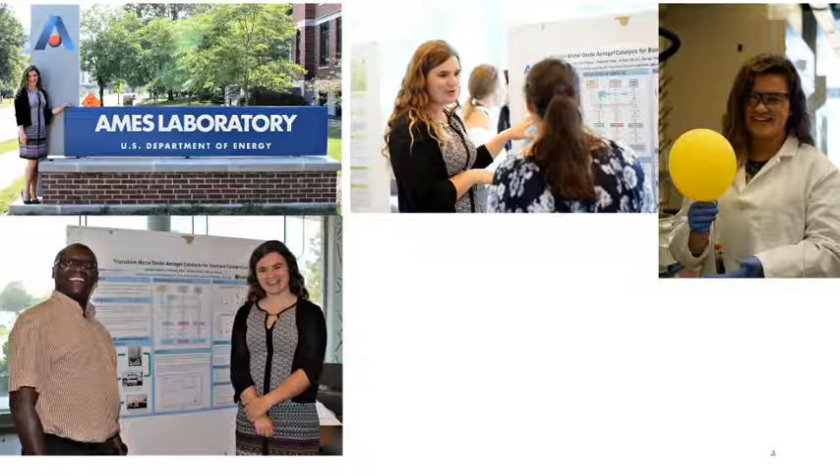So this is actually very productive for students, and I'm happy to take a student each time I go there. This time, we also have a student going there. She was working on catalysis, and this is part of the research that we were doing there. She made a very good poster. Obviously, she looks better than me, but that's beside the point. So most people don't know that during the Manhattan Project, the biggest part of the materials were actually processed at Ames Laboratory.

So the uranium was actually processed there. If you go there to work, there are some spots that are still hot, meaning you can go in and come out excited and illuminated, right?

There is also another place called the Critical Material Lab. This is where they make all kinds of exotic materials. I don't know whether you've heard of lead-free soldering, that's now the big thing, replacing the lead in solder. That material was actually developed there. It's a big cash cow for this place.

One more thing they have made is glittering paint, like you see on cars where the paint is glittering. That was actually invented or made there, and now they're starting to form a startup to commercialize it. So they've done a very good job as far as material science is concerned.

So briefly, I'm going to talk about aerogels, give you a brief history, and then discuss how they are made, some of the problems we've faced, some of the opportunities, typical uses, and then I'm going to focus on vanadium aerogel.

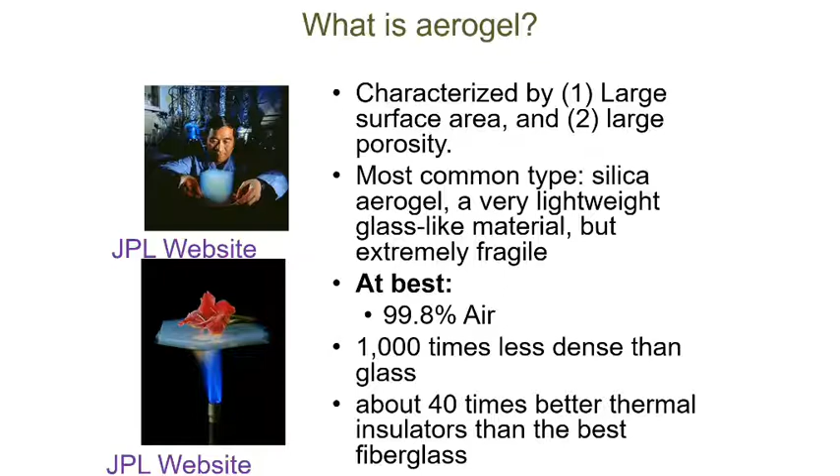We have a material that I'm working on with Dr. Demko, and if you put that material in an oven at 150 and leave it there for 4 hours, you can actually take it out with your hands. 150 C, not F, that's close to 300 and something. So those are really unique properties that we want to explore further.

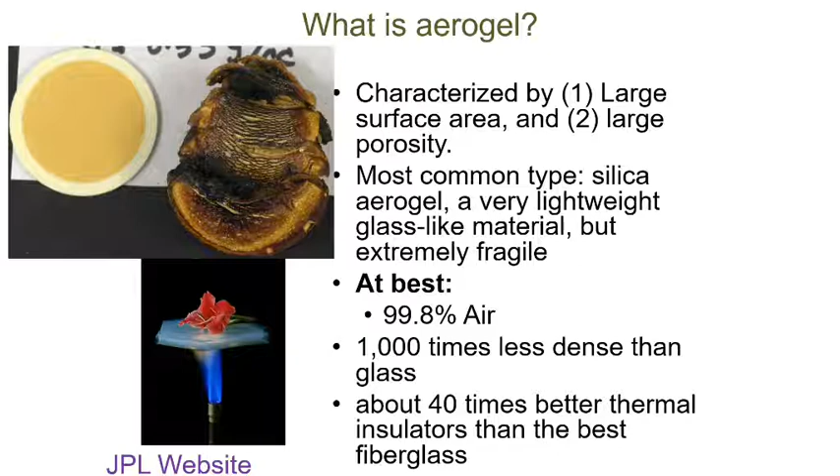Because of that porosity, they can also have some instability in them. This is a material I was working with when I was at Oklahoma State. What happened here is similar to this, but then I touched it with a Dremel tool and it started burning extremely rapidly and filled almost the whole lab with smoke. That was not the best night of my life. But you can see that they can have these instabilities that you can either take advantage of, or they can cause harm.

A brief history about aerogels is that they are not actually new materials. They were invented in 1930, around 1931, at Stanford by a guy called Kistler. He was competing with one of his buddies about whether a gel is made up of a framework of solids. The other guy argued there cannot be solids inside the gel. Kistler was trying to prove there is actually a solid framework within the gel. The key was to take out the liquid without damaging the framework, right? So in the 1930s, he was able to do that using a supercritical process, which I'll explain in a few minutes.

But then there was no use for them. For one, Kistler actually quit Stanford and went to work for Monsanto, a company that makes all kinds of chemicals, and that's where he decided these aerogels, especially silica aerogels, could actually be incorporated into toothpaste. So your toothpaste actually has some component, some remnant of this. And then, of course, they were forgotten, nobody really cared for them anymore.

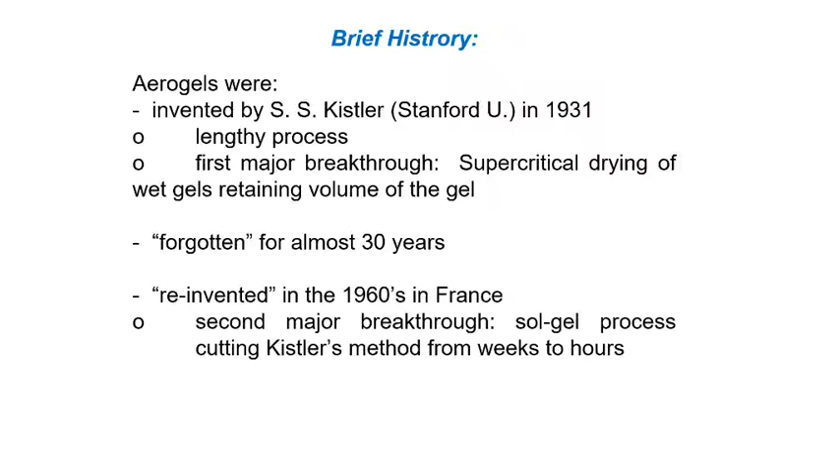Nobody cared about aerogels until the 1960s and 70s, when the French government wanted to use liquid propellant on a rocket. With liquid propellant, there's this instability that can happen when the fluid sloshes back and forth—like putting liquid in a cup and imagining what would happen. So the French government wanted to eliminate that problem by storing the liquid propellant in some kind of solid media. They decided that aerogels would be the best idea to hold this propellant, and from there they decided to use a different process, called the sol-gel process. We're going to talk a little bit about that in a minute.

This is your typical material—you can have different starting points. For example, all aerogels start from a metal alkoxide or something like a metal oxide that is dissolved in a solution. Then you can either do a spin coating, ending up with a very dense film, or pass it through a spinning process and through a furnace, ending up with a very solid piece of ceramic. Another way is to go through this route, which is the one we are going to follow.

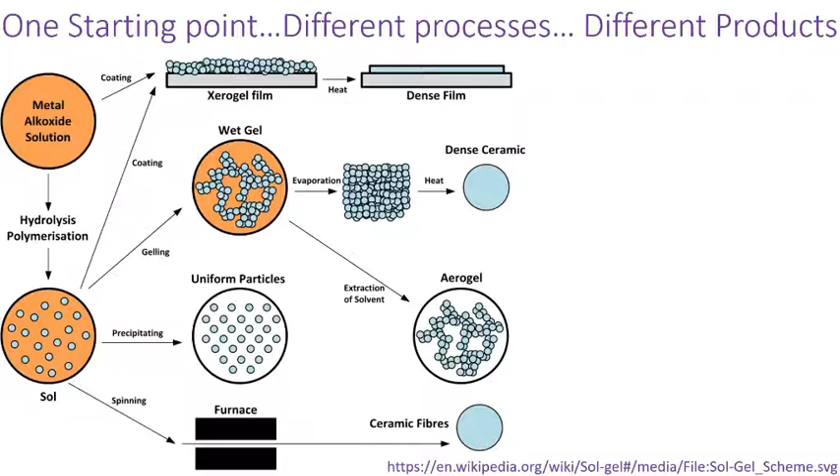It's called the sol-gel process, where you force them to form some kind of a condensate, and then you can evaporate, and then heat. You can use supercritical drying to maintain that framework. If you don't—if you just evaporate—you're going to end up with a solid piece, which is not something that you want.

But for now, I will be talking about this process that forms the aerogel. Most aerogels start like this: you have two precursors, you mix them and form a sol, which is basically a hydrolysis process. You want to wait a few minutes to age, and after you age, those networks basically stay in place—they don't move anymore.

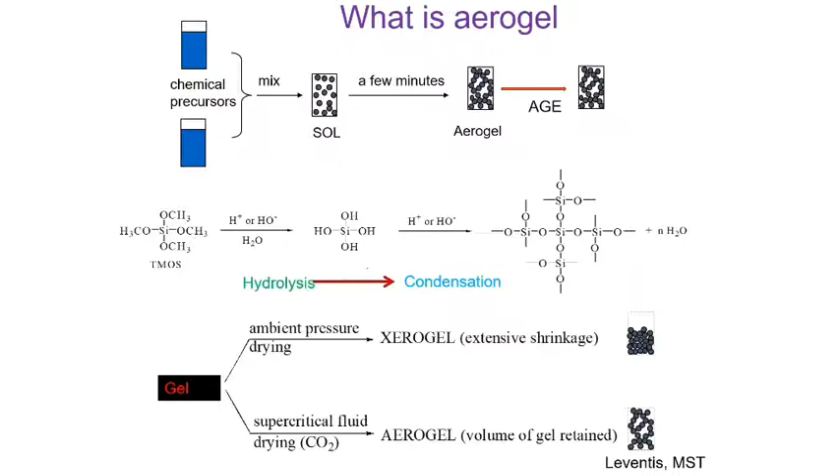We use CO2, and CO2 has a critical point at a temperature around 31 degrees and 73 or 74 bars. So whenever we are there, now we can use it. Why are we using supercritical fluid? Again, because we want to overcome what we call the surface tension.

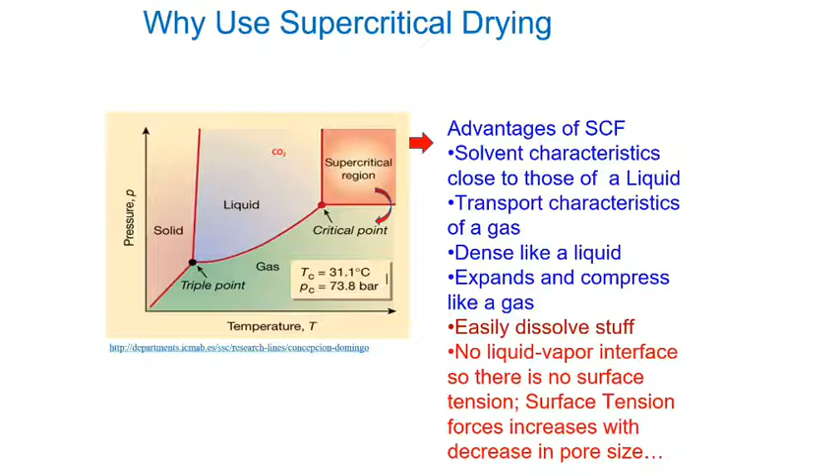Remember, if you put a fluid on a regular glass, it's going to form a meniscus. If this wall is not strong enough, it's going to pull this wall inward and break it. With aerogel, the walls are not strong enough, so they can easily break. If we use a regular fluid, we can't be successful. So most of the time, with the supercritical fluid, it's going to form a surface like this, and when it starts evaporating, it's not going to pull this inward. That is why we use supercritical fluid.

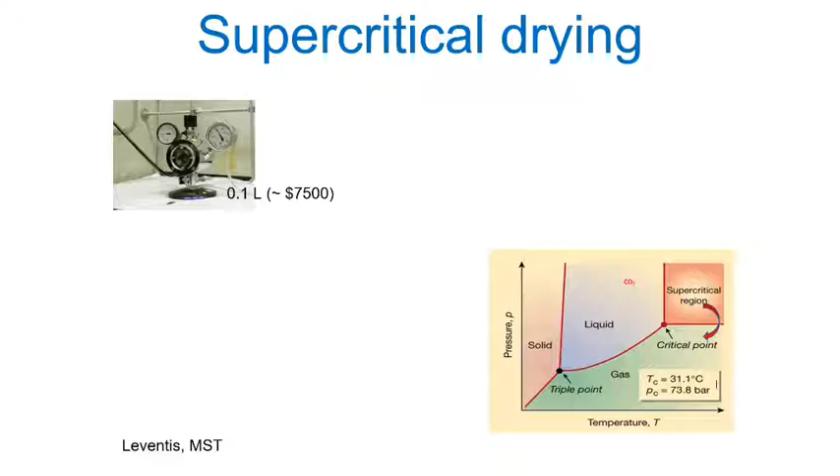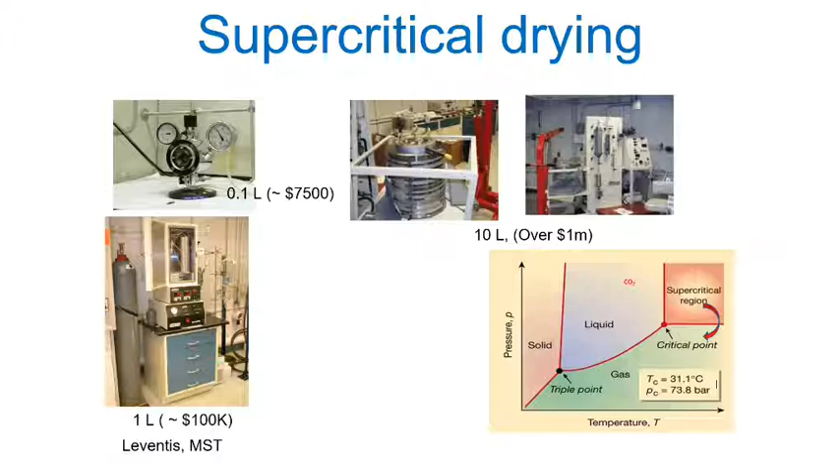But supercritical dryers are very expensive. This one is from MST, another one from MST, and this one is from NASA - just a 10-liter container costs 1 million. This is what we bought at UTD, where we did this work, and this one is not very expensive. So again, we have the process going, but we want to figure out whether we can do other things.

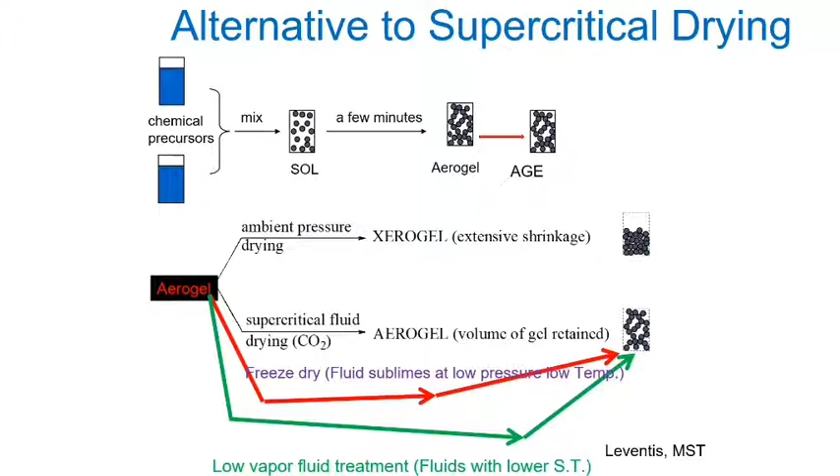Can we actually avoid supercritical dryers, which are very expensive, and try something else? One option is freeze drying, where you basically freeze the sample, reduce the pressure, and the fluid sublimates - if you freeze and then lower the temperature and pressure, you get a sublimation process. Another thing we developed at UTD was a low vapor fluid treatment, where we try to mimic a supercritical fluid by using a fluid that doesn't have any meniscus. Meniscus is your enemy, so we don't want to use that. That is something we have done before.

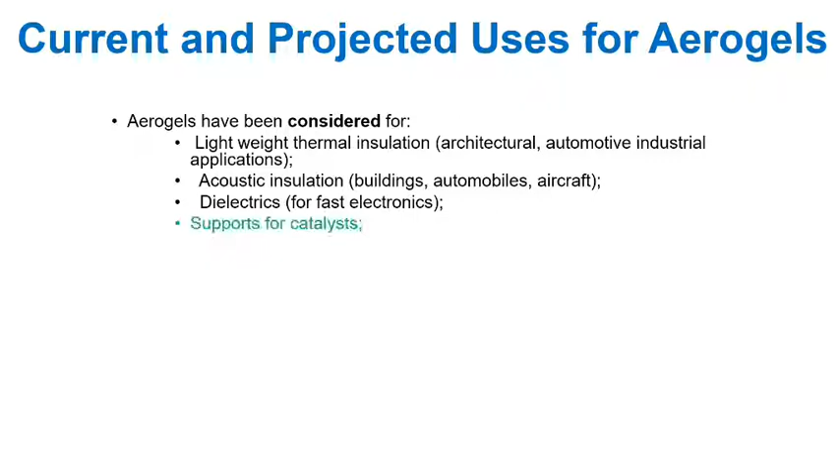So why do we care about these materials? One is for thermal insulation - Dr. Demko and I are going to be exploring that. Acoustic insulation is also very good. We can use it as a dielectric, something else we'll be testing, and for catalytic support, which is what we went to do at Ames, and I'll give a brief on that. Also as a host for other chemicals - we used some of the aerogels we developed to host other guests. We can also use it for filtration, optical sensors, aircraft structural components, and as Cherenkov detectors.

Do you know how this one works, by the way? Anybody know how a Cherenkov detector works? No? So basically, if you have a radioactive or nuclear power plant, you want to put something that can detect radiation particles. When those particles are released, if they go through the aerogels, they are diffracted at different angles - just like when light refracts. So we can tell what kind of particles are being emitted from a radioactive source.

They can also be used for tissue engineering. This is something we've done because it's so porous - we can introduce a cell, and that cell can grow. For example, we can direct how a bone is going to grow - if we introduce a bone cell, we can actually do that. That is work being done at Oklahoma State. I was involved briefly with it, but that's probably not something I'm going to keep pursuing.

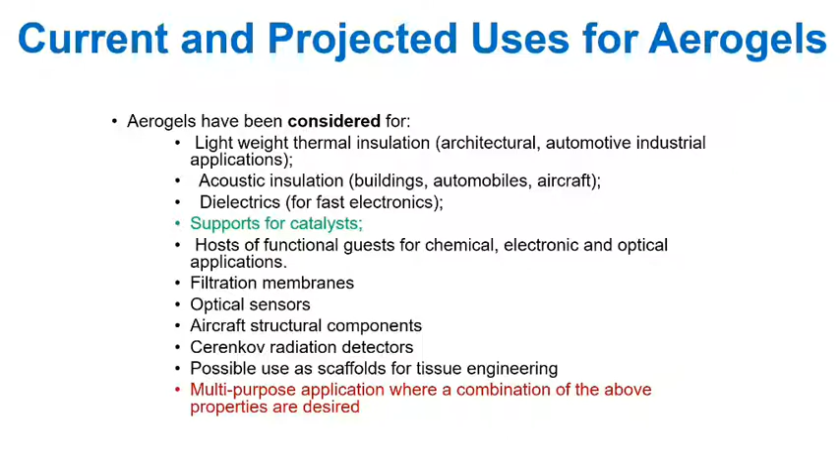One of the most important things is that all these properties can be found within one sample - you can have all these combinations in just one sample. They have actually been used, for example, to trap comet dust - NASA used this to trap comet dust. They made this racket, and when the spacecraft passed through a comet belt, they were able to trap this within the material. Another use is to reduce the heat signature on an aircraft, especially special forces helicopters, where they don't want to be detected. They can put a piece of aerogel on it, and that will reduce the heat signature.

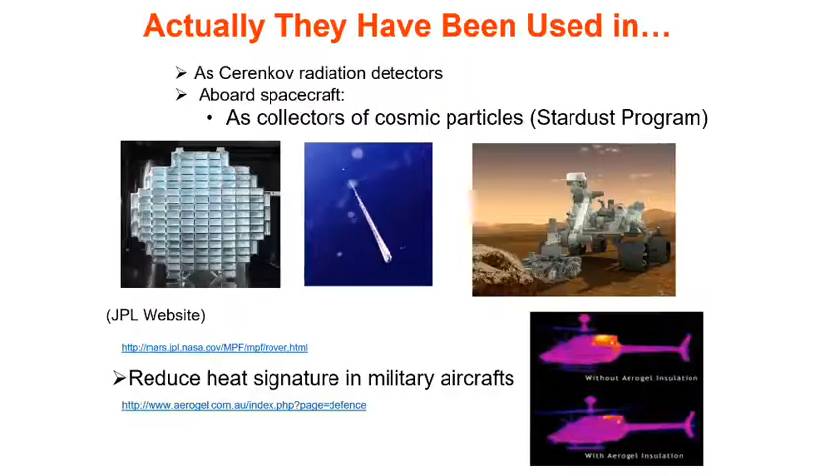So, did you see that?

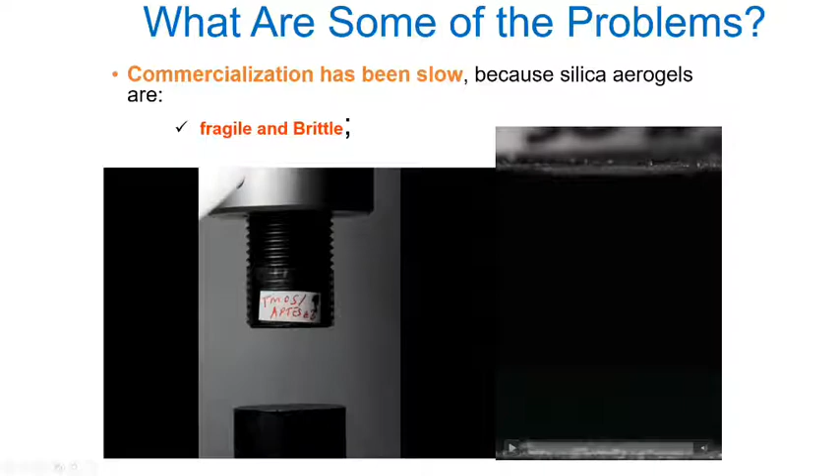So if you apply any kind of force, they are going to fracture.

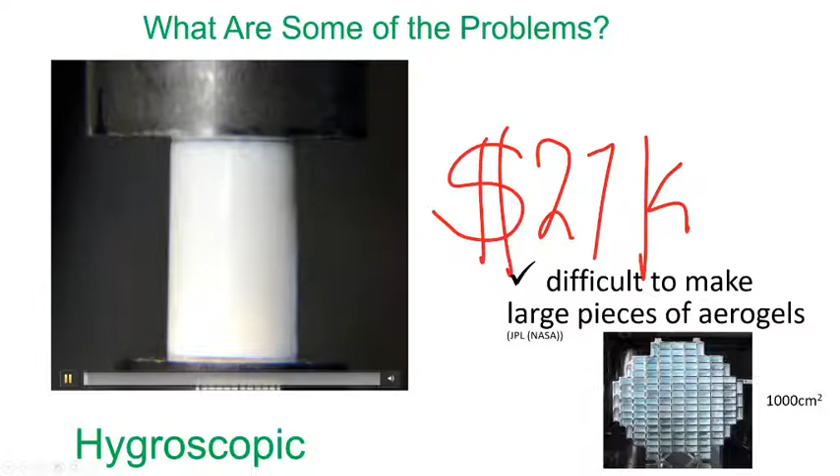They also absorb water. This is a sample that we made, and we just left it on the bench. When we did that, this is all the water from the air that was absorbed by that sample. So you can see it can absorb quite a bit.

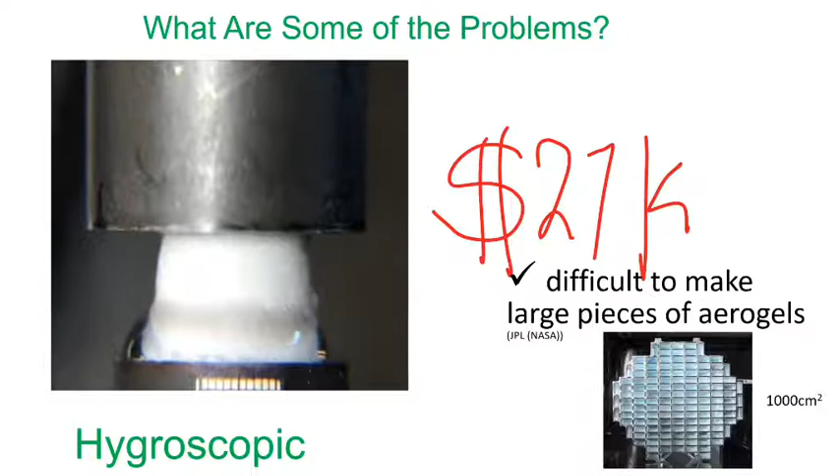It's just like crushing tofu. Yeah, you don't want to eat this one though.

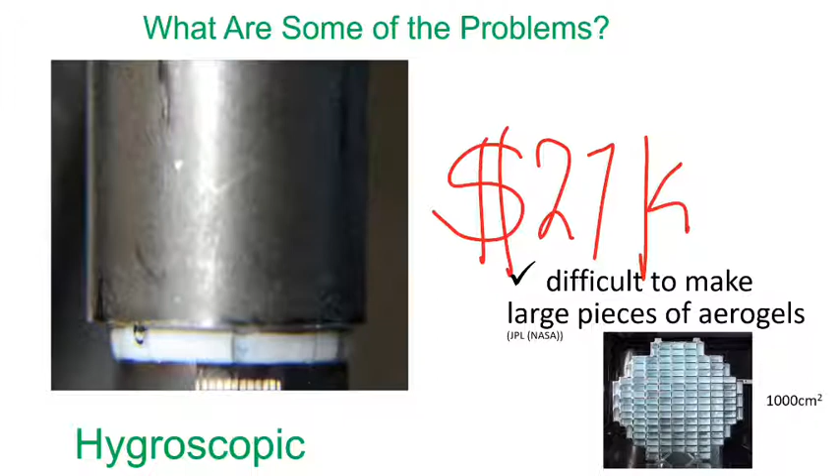Good for you. Yeah, so also the supercritical dryer is very expensive. And if you look at this, when NASA wanted to make this racket, they had to actually make very small pieces and then put them together, because they can't make one big piece. So that is something that we wanted to overcome, basically eliminate this so that we can make bigger pieces.

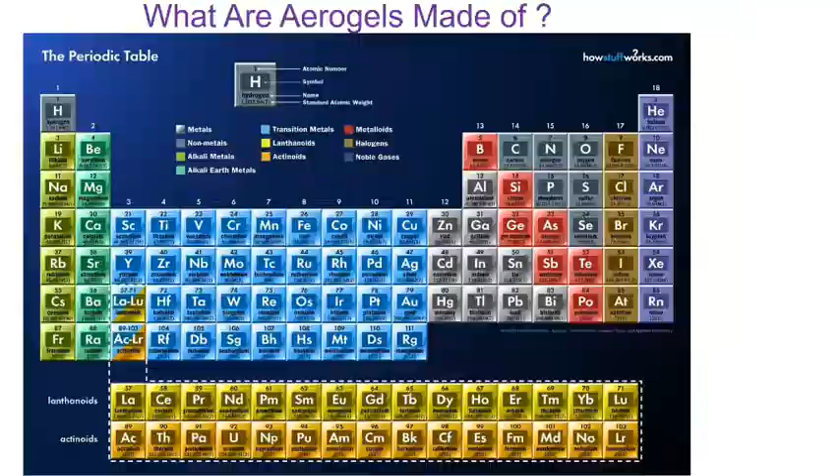So aerogels can actually be made from most of these elements on the periodic table. If you look at the periodic table, you have all these beautiful looking elements, and you can actually make aerogel out of them. The process is like, if you want to make an aerogel, you can either choose an organic piece or an inorganic piece. In this case, there are the natural ones, like cellulose. We can have man-made ones like polyurea, polyurethane - we have made all these. And also, if you want an inorganic piece, you can choose from all these exotic pieces. Each one of these is going to have special characteristics that you can use for special cases.

So you can have either native aerogel, or you can also cross-link them, meaning you apply a coat of polymer, and then you can easily form what we call cross-linked aerogels.

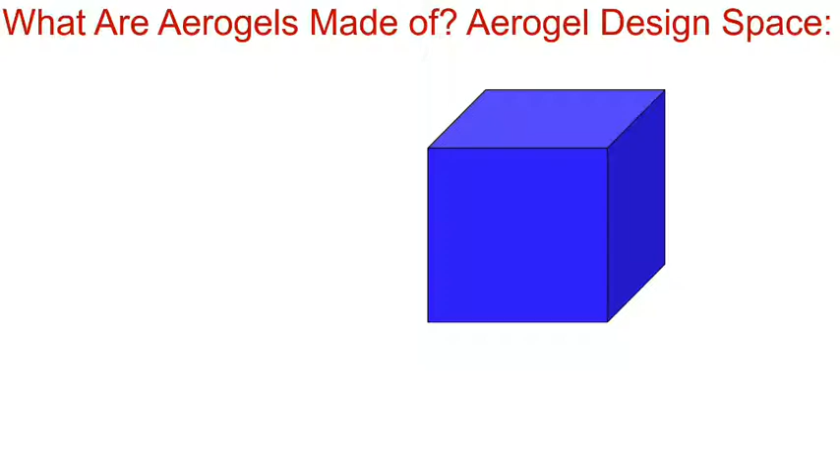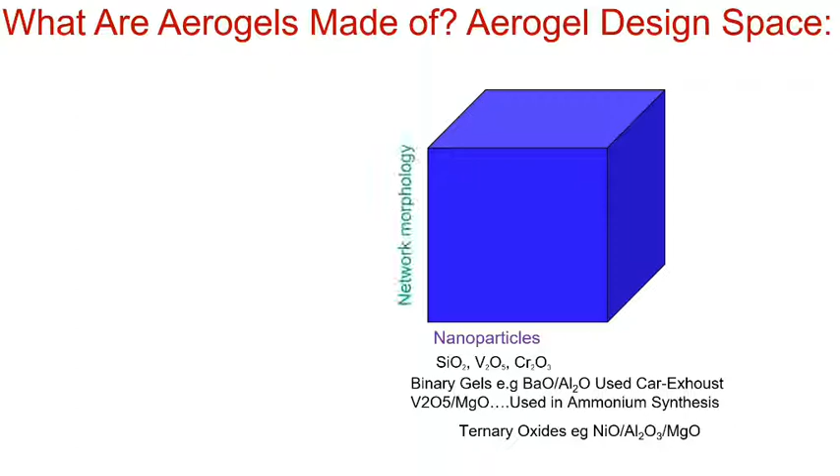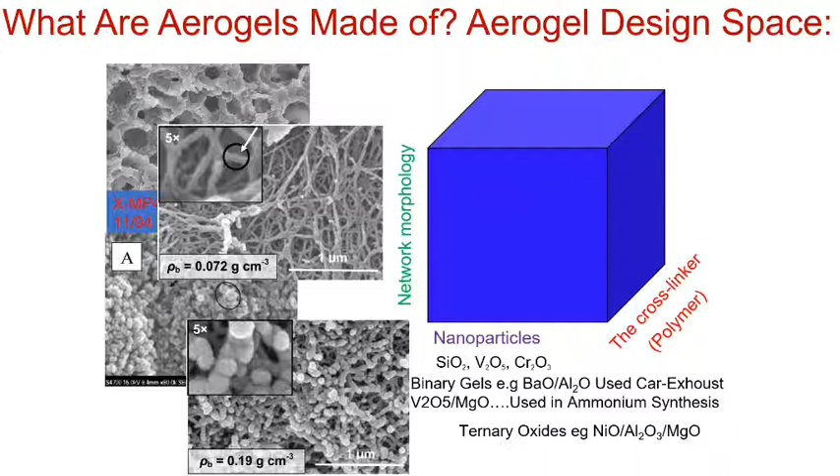We can also have this kind of morphology where you have, basically, this is like a string kind of thing, or you can also have this type. So you can choose the nanoparticles, you can change the morphology, and the third thing you can do is cross-link them. You can have all these and now use a thin layer of polymer to make them stronger.

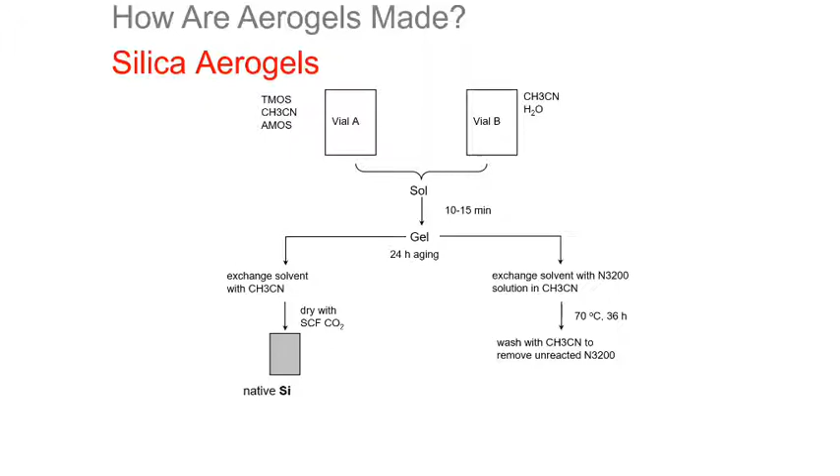So if you start with a silica aerogel, which is the basic aerogel we have in our labs, you start with 2 vials and then mix them. You are going to gel and then age, form a sol and then age, and then do an exchange - some kind of solvent exchange. Then you can dry it with a supercritical dryer to form a native aerogel. If, on the other hand, you want to add a polymer, you can add it to make it stronger, and then you can end up with something like this.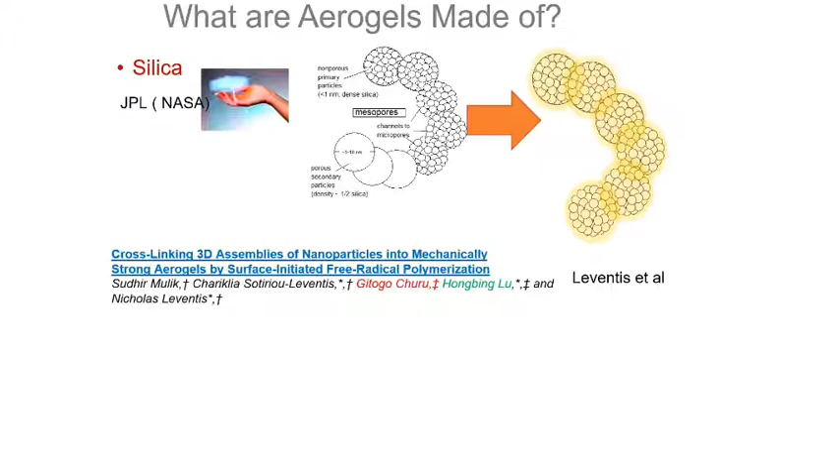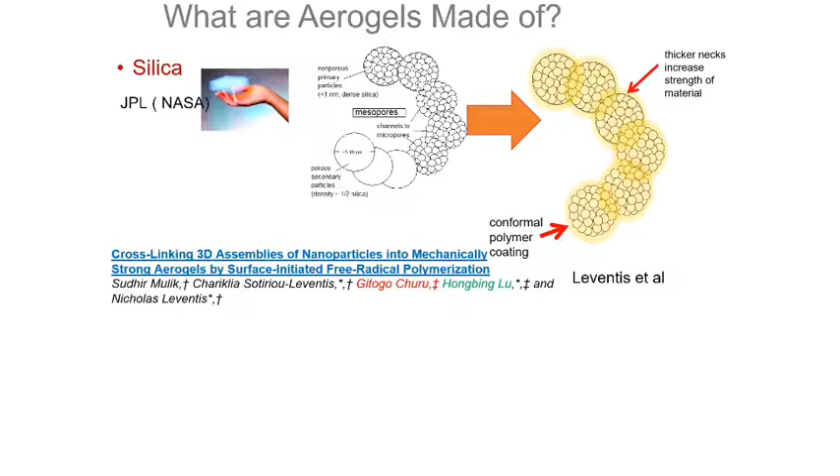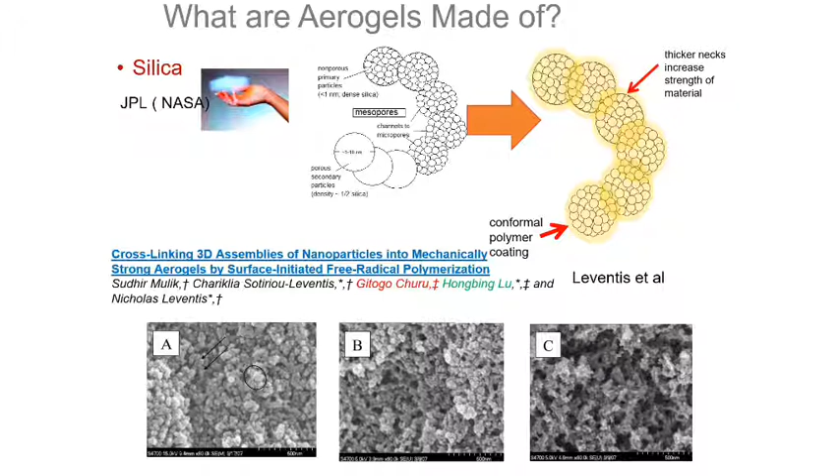And that is what we have done here. We started with a silica aerogel like this, and then we cross-linked it to make it stronger. Basically, we are adding a layer of polymer without increasing the density. This was developed a few years back - we developed it when we worked with this group at MST, and we have been working with them for quite some time. So this is the coating we are talking about. And if you do that, we don't see any difference between the cross-linked and the non-cross-linked - they remain porous, but they are a little bit stronger.

Polymers are something else we have done. We have done a lot of polymer samples. We can change the morphology of those polymers and come up with all this good stuff. One thing we did - since we're in mechanical engineering, we like to crush things, we like to make material suffer - is we compressed it.

And when we did that, it became transparent. Your physics should tell you what happened here. I can't remember - there is a process where something becomes transparent after application of pressure.

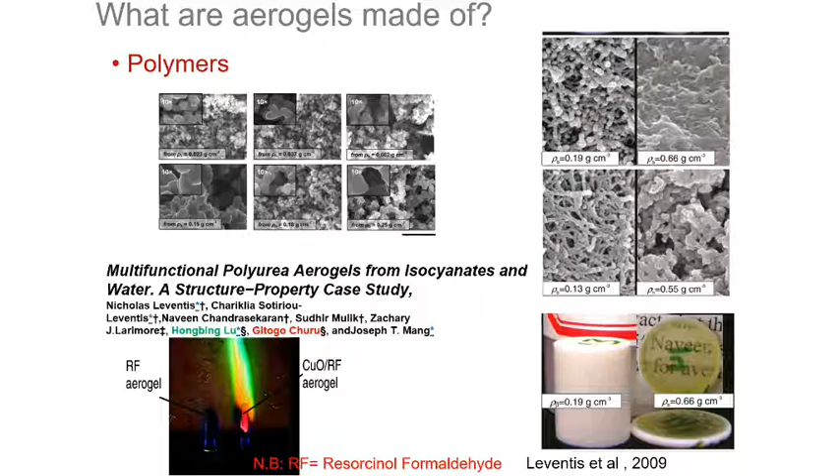This is another case where we have another aerogel, but this time we put copper oxide in it, so we have an oxide. The RF, which is this material here, was like a polymer. And then when we introduced fire, we completed the fire triangle, and this material can burn extremely fast and in an extremely scary way. So if you are ever burning this, make sure there's somebody watching so they can come and rescue you. That is basically how you make an explosive, but it's not good for you.

The other material we have worked on is called the vanadia aerogel. This is the material we went to work with at Ames because we wanted to use it for catalysis. The process is very similar to what we did with silica.

We did some compression tests, and as you can see, we can actually compress it to a very high percentage. We tested it at minus 150 degrees, and we got this really good curve, meaning we can actually use this for insulation when the temperature is really, really low. One instrument that uses this low temperature is your regular - what do you call it - the one that scans you when you go to the doctor, the MRI. So we can actually use it in this case.

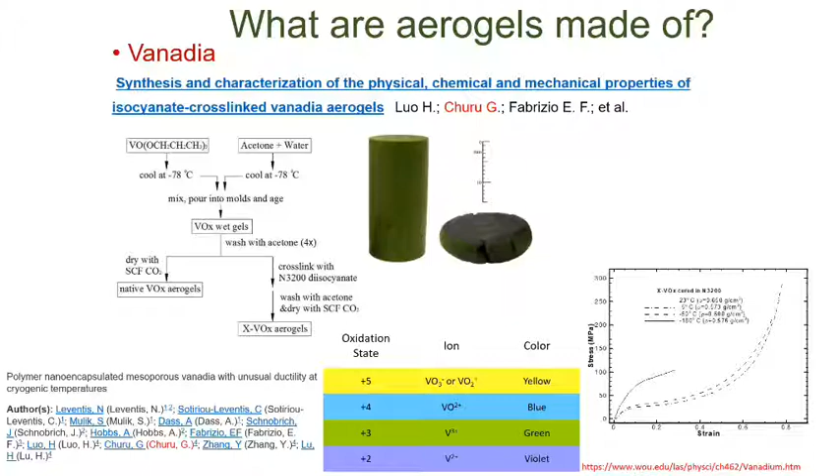Another application that a group at Ames was studying is being able to incorporate some metal oxides or other gas elements and form what we call a nanocomposite. When you have a nanocomposite, you can actually replace this with, for example, a chemical that you can easily direct to go attack a tumor.

So how would you use such technology? If you had a way of delivering chemicals to a tumor, this could actually be used for therapeutics, and the guys at Iowa State are actually looking into that.

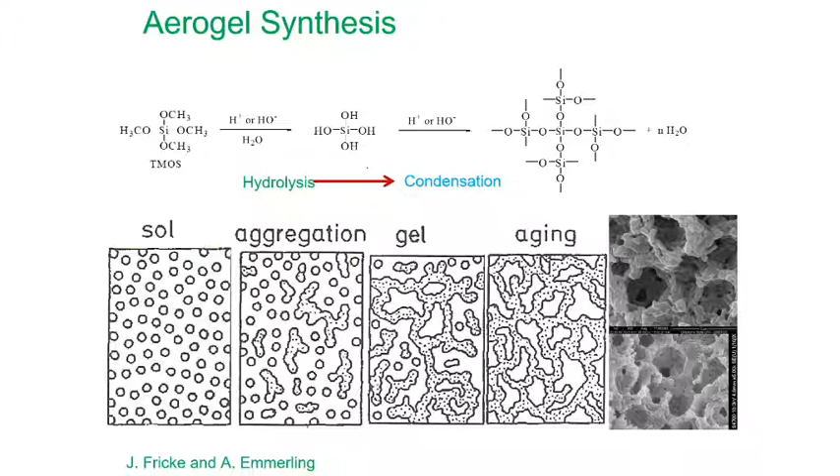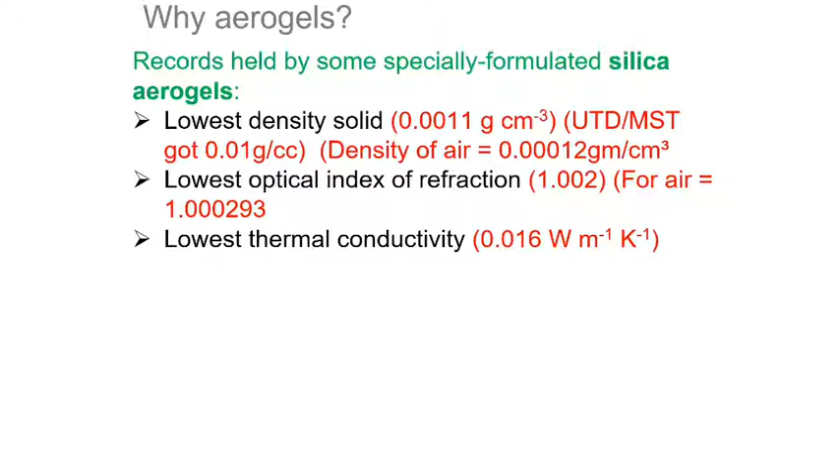So again, this is basically how the aerogel is formed: you have the sol, you force it to aggregate, and then you age it, and then you get to that point. These are some of the records we have seen - the lowest density, best optical index, lowest thermal conductivity, which we are going to be going through, dielectrics, and also all these can be found in the same component.

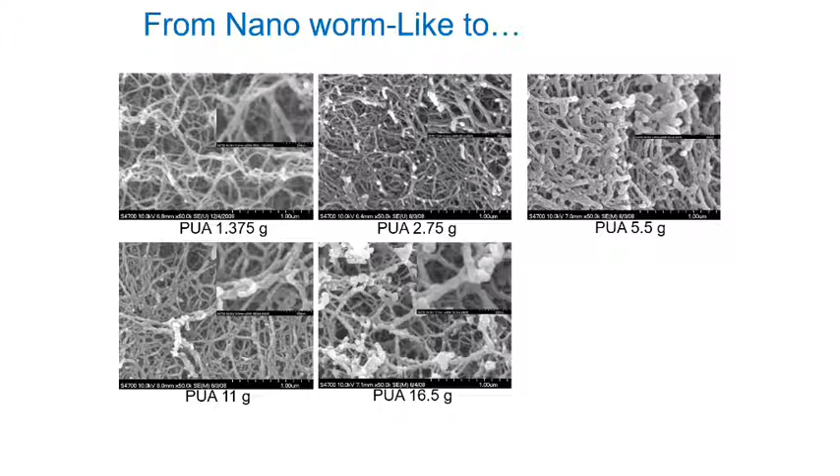Now I'm going to talk about the organic aerogel, and similar to what we saw with the silica aerogel, you mix two vials, and you can either form a gel or a precipitate, and then when you do supercritical drying, you end up with this. These are some of the morphologies that we have done in the past.

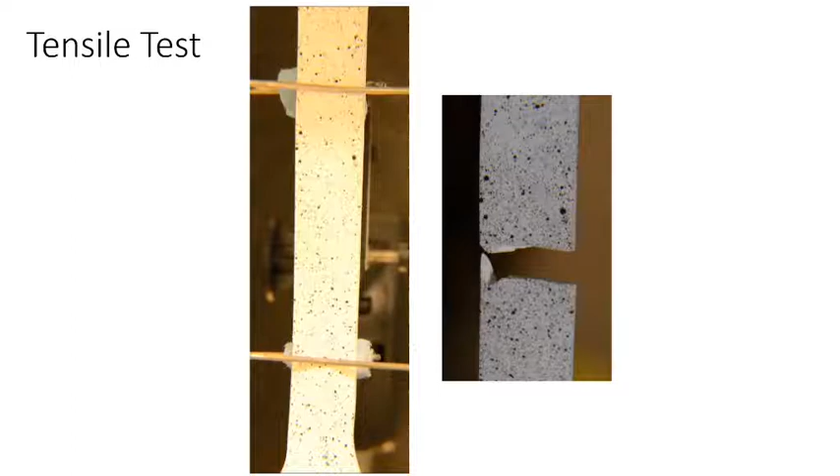We also do a lot of tensile tests, which I hope we can do here. These are some of the biggest samples we have been able to do. And again, as mechanical engineers, we like to break stuff, so this is going to break right there. This is an example of that, and these are some of the data. We want to get the tensile stress, tensile strain, so we know how much this material can take before it breaks. This is actually very good data, right?

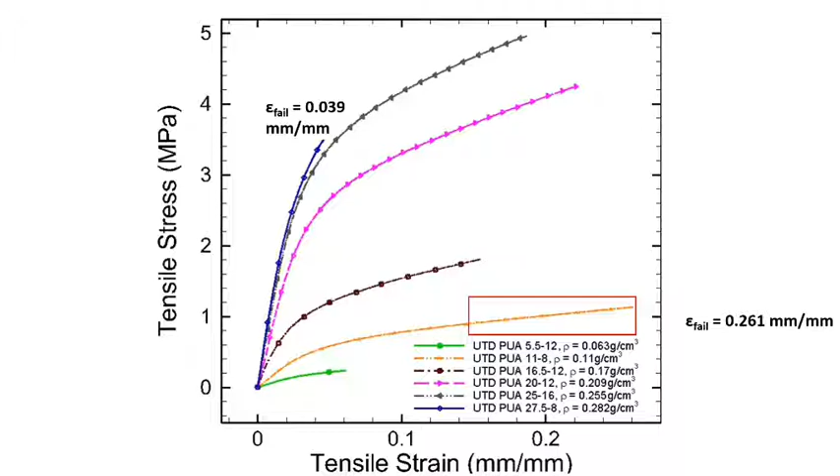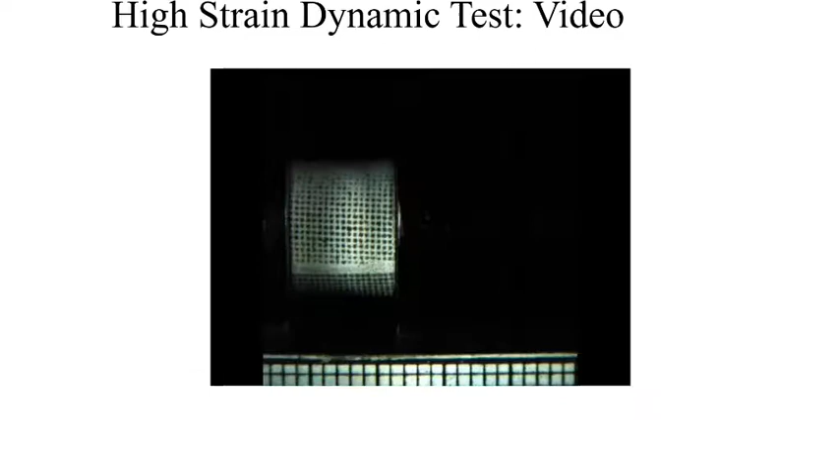Another thing we have done, especially at UTD, is use a high strain dynamic test setup like this. We put the material here and apply an impact, and the material goes here, and then we use a high-speed camera to observe. In this case, we had a camera that could record up to 3 million frames per second, but here we needed 60,000 frames per second so we could record that event. This is where we recorded that, and this is the result of that impact.

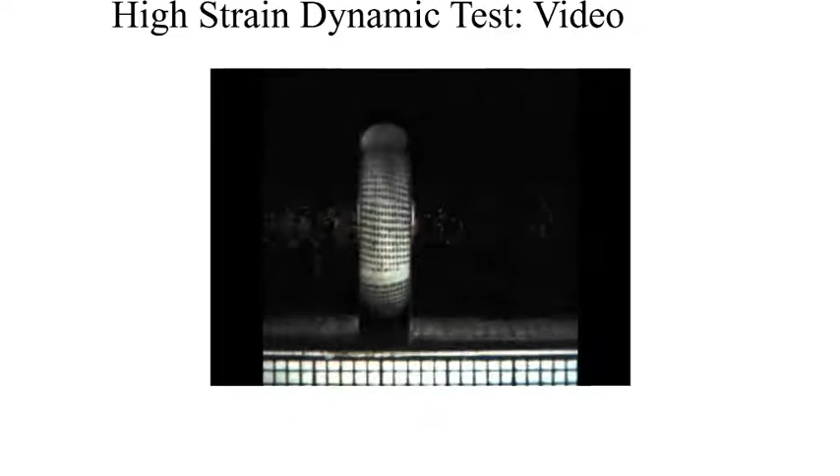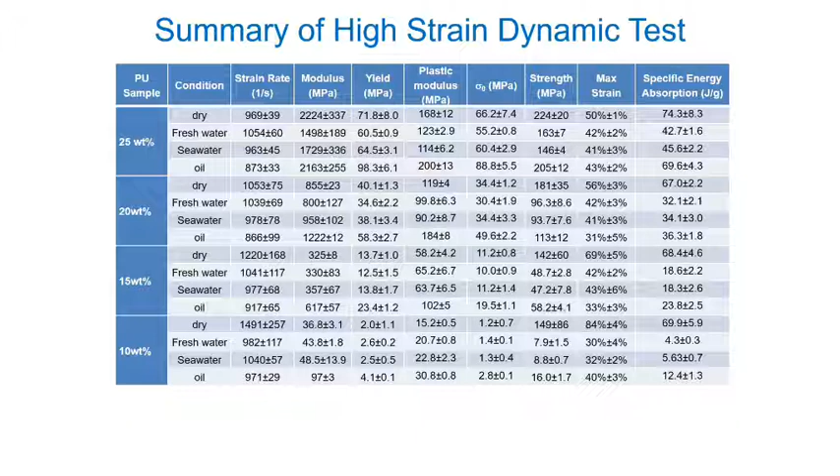This is how the impact happened, captured on high-speed camera. Of course, we can generate the mechanical property data we want, whether it's modulus, yield strength, and all the other good stuff.

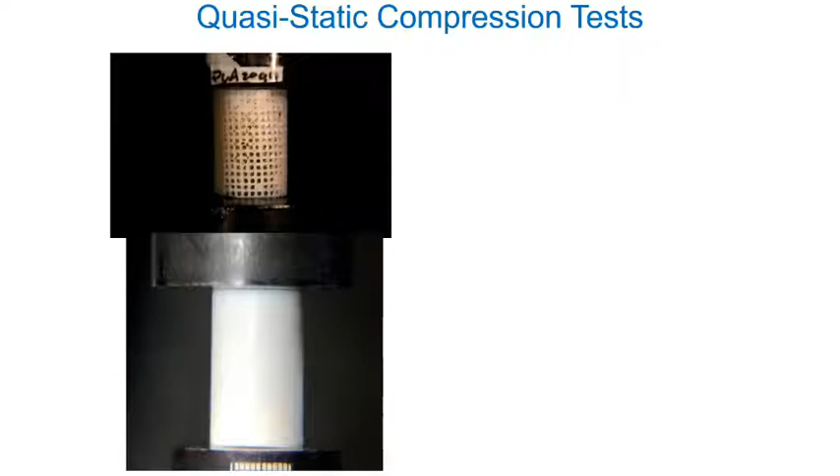We also did quasi-static tests, where we just compress the samples. In this case, we put it in water because we wanted to see how the mechanical property changes when the sample is soaked in water.

So it doesn't shatter like the one I showed you at the beginning. This one is organic, so it doesn't shatter as much. It took a few iterations to make it not do that.

So are organic ones less fragile than inorganic? They are less fragile, but still fragile. This was the first strict control so that you don't get the fracturing to happen as much as we wanted.

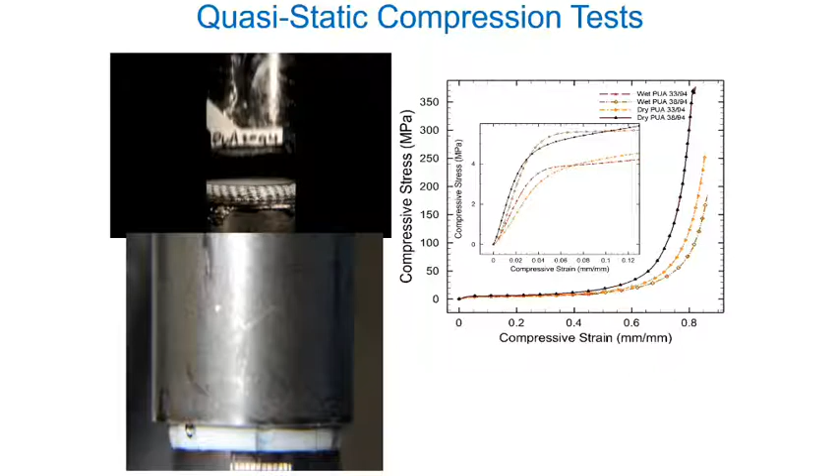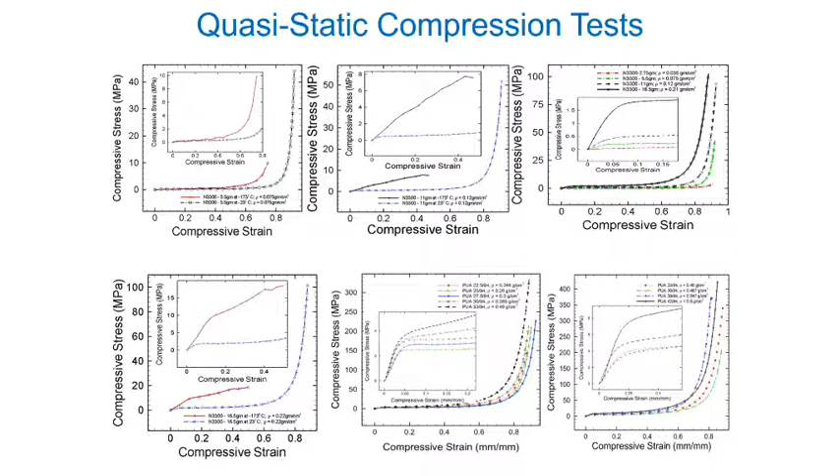So this is the data that we get: compressive stress and strain. We did that for a lot of samples, and we got this series of data. We also did another test.

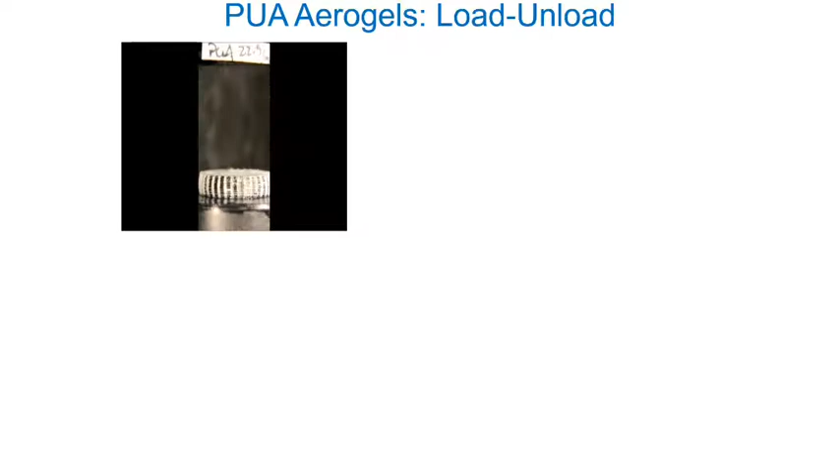This is where we decided to do repeated loading, and as you can see, we are able to get this hysteresis graph in this case, and also something like this.

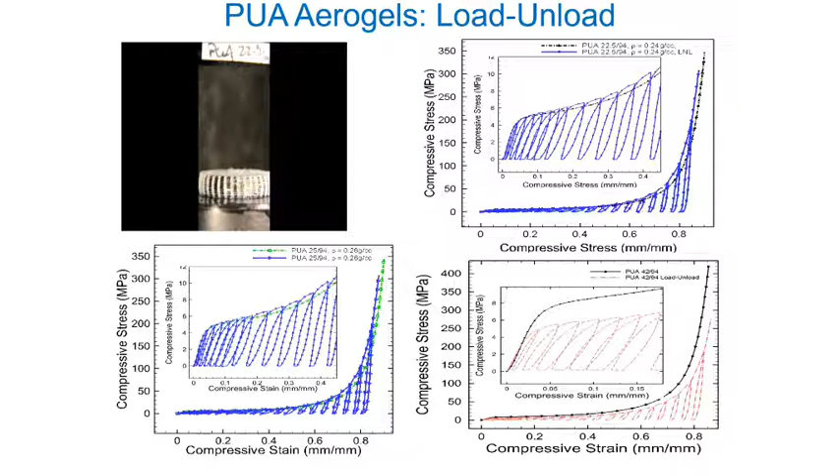So this is where we repeatedly abuse the material to see how much it can take. By the way, this is something we can do here — we have an instrument that can do this, so that's going to be a big help.

So this is the data we got. I'd like you to pay attention to the specific energy density of this material — it's relatively high compared to other materials.

We always like to compare any material you develop with what is found in nature. What is the strongest material in nature? Spiderweb, diamonds... Diamond, spiderweb. The spiderweb has a specific energy density of 169 joules per gram.

That's much better than Kevlar and all the other materials. That's why in the tropics there are spiders that actually hunt birds — the bird will just smack the spiderweb and get trapped. So if we can get as close to that as possible, then we are in good shape.

Also, our advantage is that we can do it at lower temperature and still maintain really good energy absorption capabilities. So these are some of the tests that we have done.

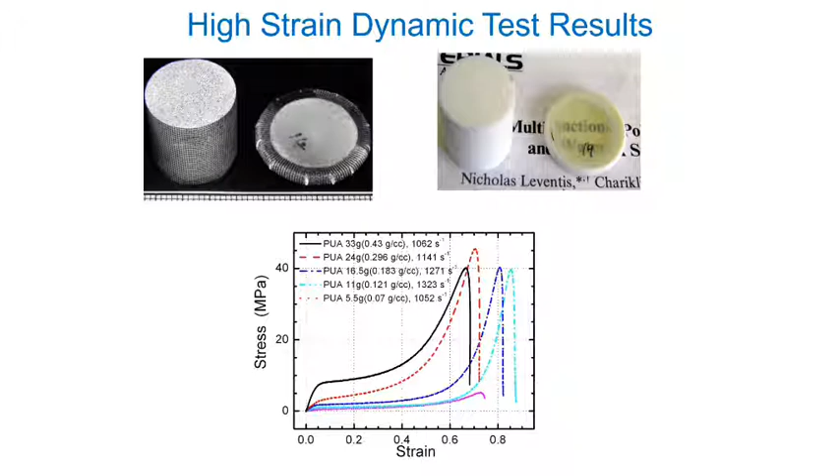Another thing I want to talk about now is the acoustic tests we have also done in the past. This is an acoustic tube at RPI in New York, which we use to test the acoustic properties of the material.

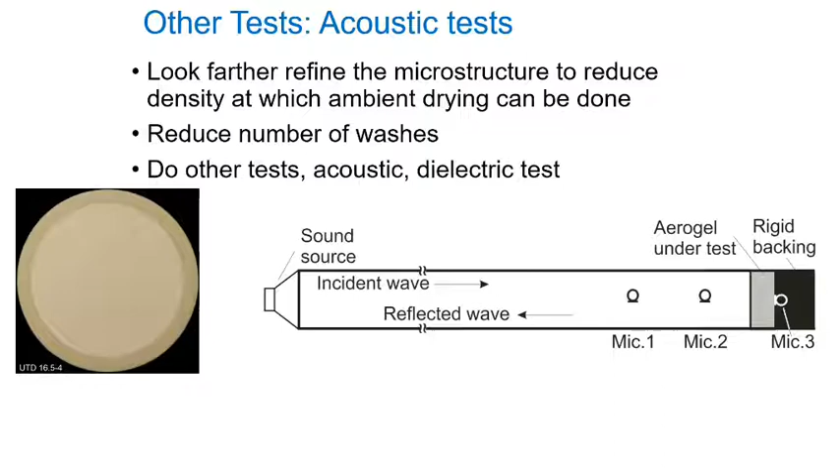So in this case, we put a sample here and we listen. We set an incident wave, and now we can listen to that material and see whether there is anything that this mic is going to read.

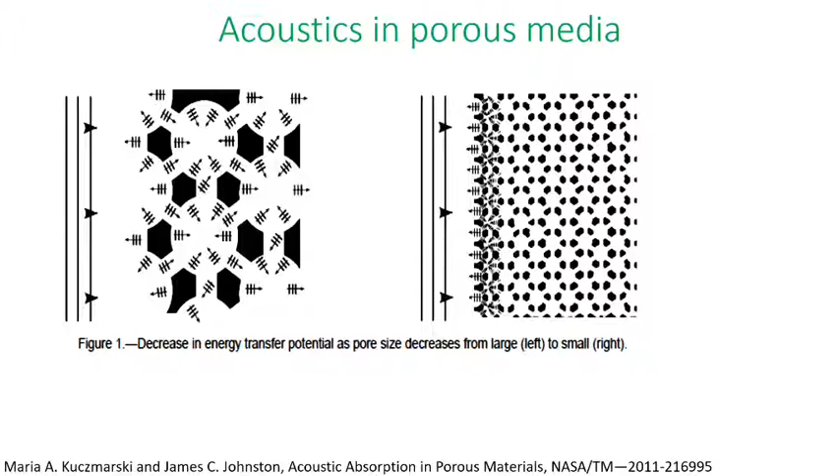So this is normally how the sound wave is. We anticipate this is going to happen when the wave is traveling through porous materials — it's going to be broken up continuously as it travels, and when that happens, the energy of the wave is absorbed.

This is actually very important because of what has been happening in the last few years, where we have cases of blast waves.

If you look at a blast wave smacking your brain, it's going to cause this kind of event to happen — basically trying to pull the brain apart and then bring it back, causing strain and stress. So this is a big problem, right?

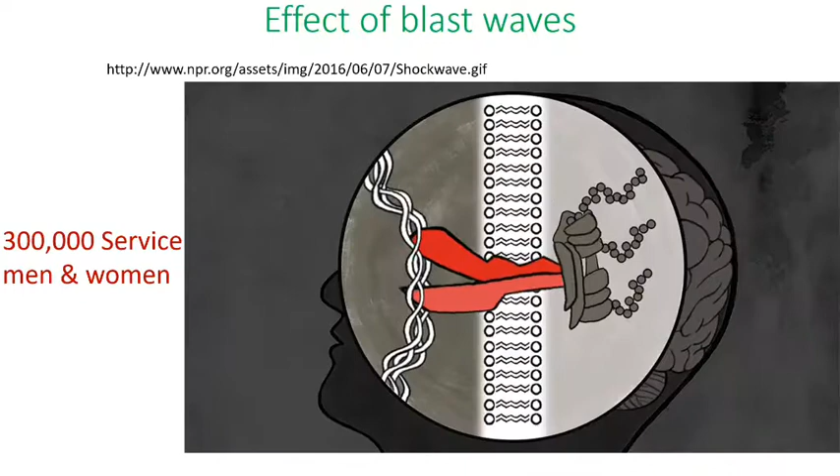So what happens when a blast wave occurs, especially whenever there is an explosion, is the wave actually starts traveling through your brain like this.

What makes this even worse is that sometimes people are wearing helmets. You'd think that's a good thing, but what happens when you're wearing a helmet, especially a hard helmet, is that the wave does not get out of your head.

Instead, it starts pinging back and forth, and when it does that, it actually gets amplified. So it's actually worse for somebody wearing a helmet, especially if it doesn't have the proper insert — it's actually worse than if you didn't wear any helmet, because the wave will just go through and continue on.

So when that happens, if this is your brain before the blast wave, this is your brain after. So this is the, what do you call this?

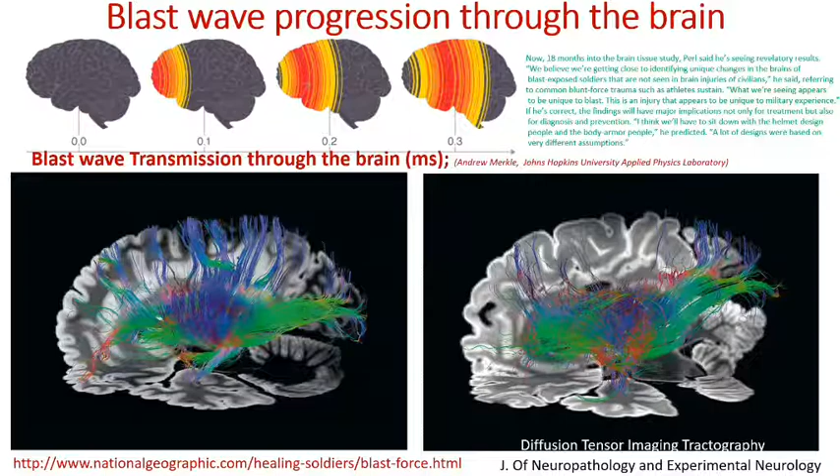This is how your neurons are going to look like after this. So this is a big, big problem. We need to be able to basically block or at least absorb that energy.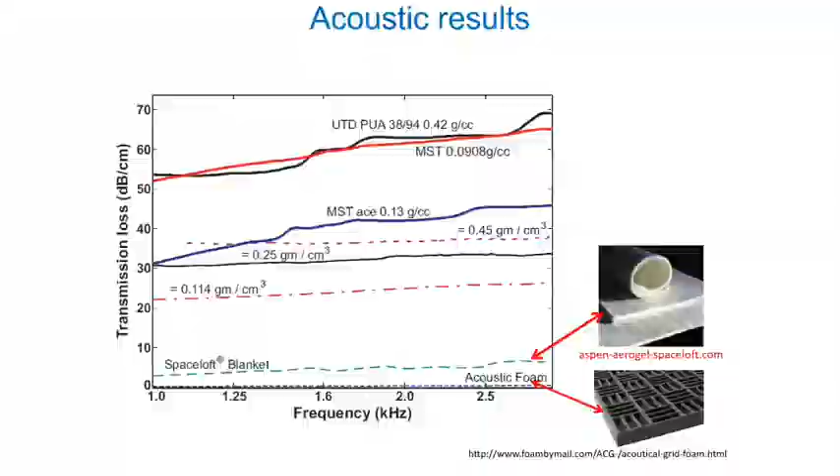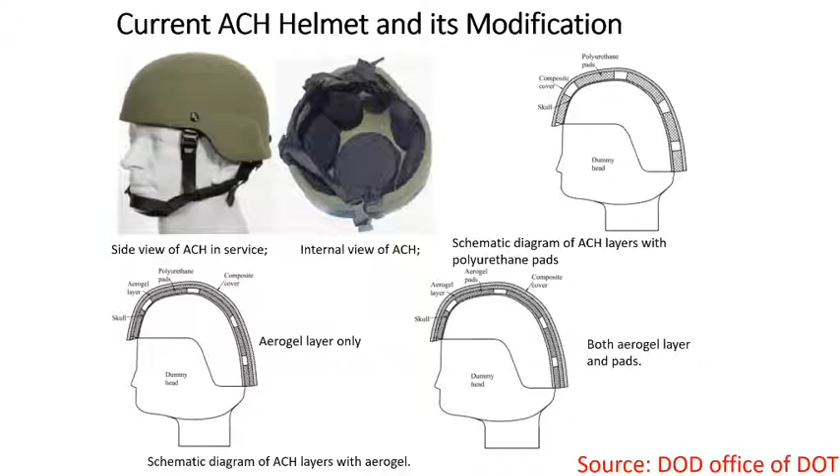We were working with the DOD, and they gave us some helmets. We took out the inserts and replaced them with aerogel inserts. Then we built this tower at UTD, and we were able to do some impact tests or drop tests, and then we would collect the acceleration data that the insert sees when it's in service.

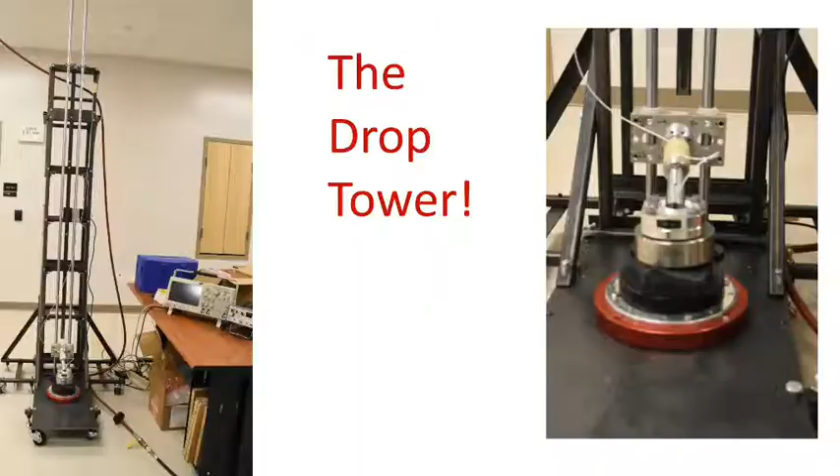So these are the two pads. Now I want you to look at the impact on this one. Now you see that thing going away—it's not going to come back anytime soon. Oh, it's going to come back. There it is. And then it's going to bounce back a little bit. But look at what happens when you do an aerogel drop.

So what does that tell you? So do you want your head here or your head here? My head anywhere—but if you don't have any choice, where do you want your head?

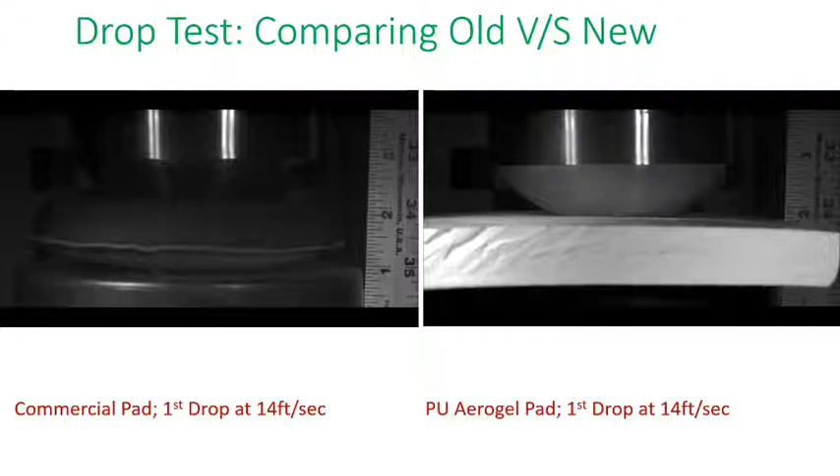So this one, by simple logic, you can see that this guy did not absorb any energy—that's why the thing is bouncing up and down and going through the roof. This guy just bounced a little bit, and then everything was attenuated. So that is why we wanted to replace this.

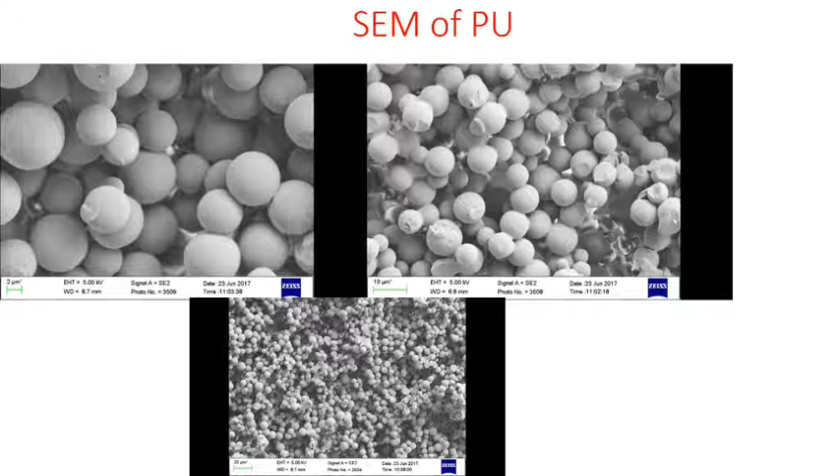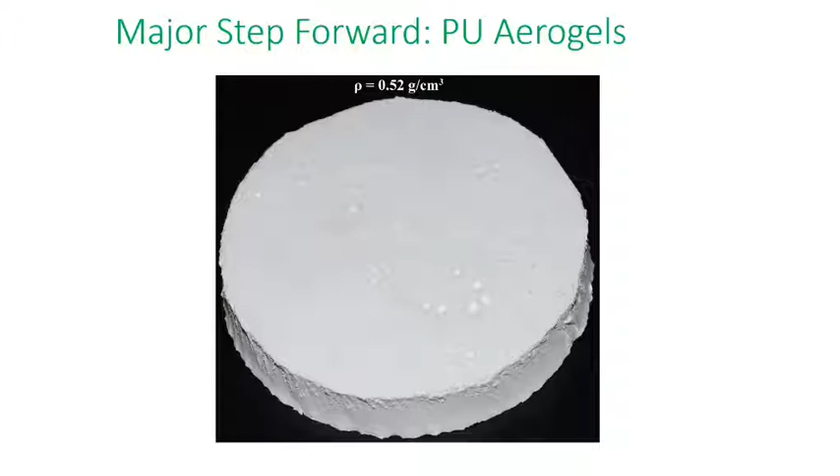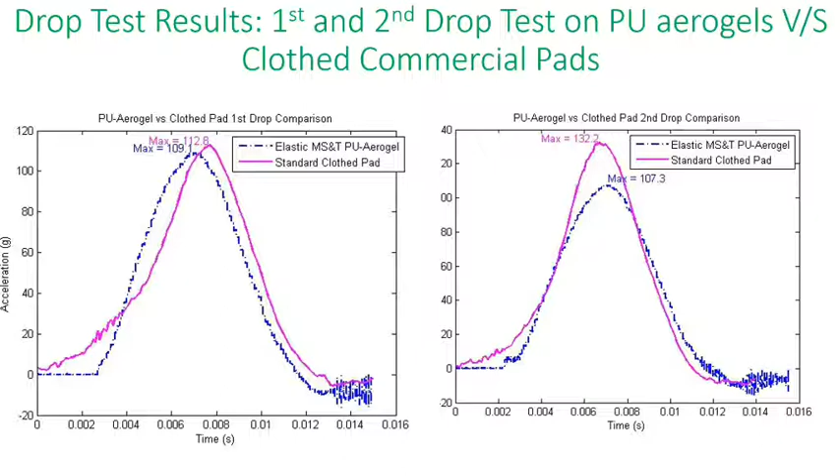But right now, the newer generation that we have come up with is going right around 60 something. So we are headed in the right direction, but still work needs to be done, especially to reduce the density so that it can actually be applied.

So what we have done so far is come up with a newer type of aerogel that can absorb more energy, and we can make it in bigger sizes. Remember, NASA cannot make bigger sizes because they haven't innovated enough to replace the supercritical dryer. We can replace that, and we are kind of happy with that. We did that by replacing the supercritical fluid with a low vapor solvent treatment, which I can explain further if needed. And we can actually make them bigger—much bigger samples.

The other part of this is what I was actually doing at the same time when I was at Iowa: being able to convert biomass into biodiesel, biofuels, and other things. The Earth's surface has a lot of grass, and especially in Iowa where they grow a lot of corn, they'd like to take whatever is left after harvesting the corn and use it for something other than throwing it away.

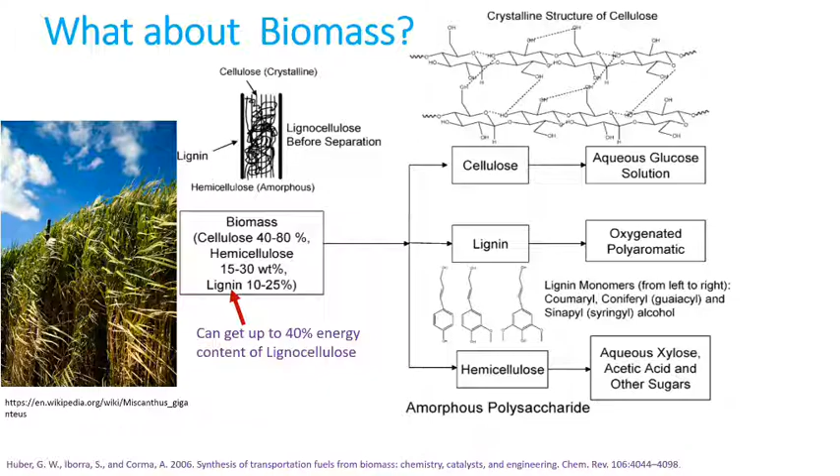So in this case, our job was to develop a catalyst that can help degrade this biomass into biofuel or biocomponents. The problem is this material is made up of something called cellulose and also something called lignin. Lignin is one of the components, and if you look at the structure of lignin, it's extremely complex.

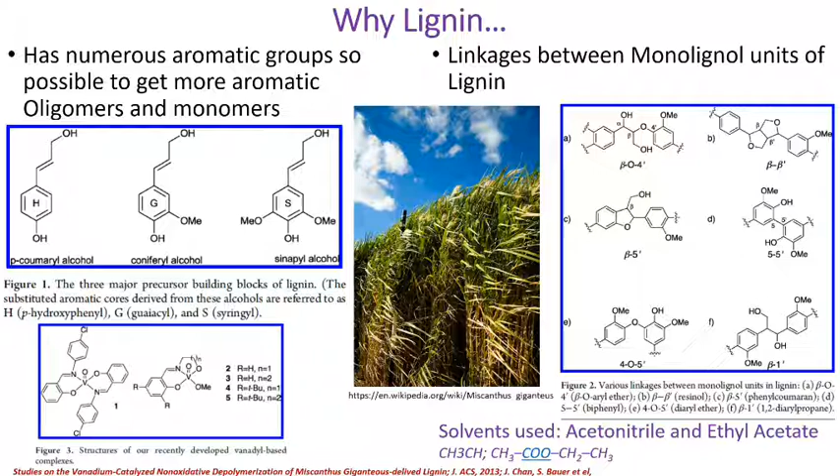Our job is to try to break up those bonds into something smaller, something easier. We found that we can use certain approaches to break it up into smaller molecules. From this complex molecule, we want to break it up into fragments, and then hopefully we can select and filter them and use them any way we want.

Other people have done this, but they have used vanadium to catalyze it. But what we wanted to do, because aerogel has such a high surface area, is see whether we can introduce other guest chemicals. The one we were targeting is the platinum group.

Ever heard of the platinum group? It's not a musical band. It's part of the periodic table that has all these platinum-based elements—they call it the platinum group. I'm not in chemistry, I'm in materials, in a different department, but there is a section in the periodic table called the platinum group.

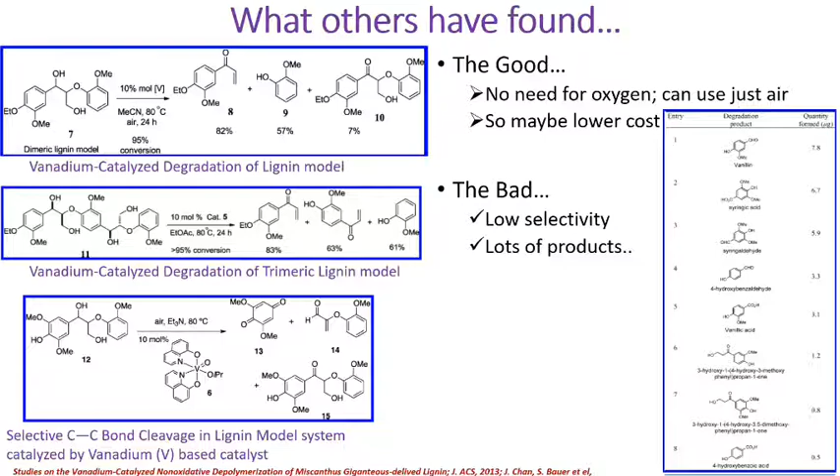So we wanted to introduce those groups because they are very good catalysts, so that we can cleave this bond and form something like this.

Another thing people are looking at is methane, which is a very simple molecule. Methane is CH4, right? What if you could make it C2 or C3 and then something else?

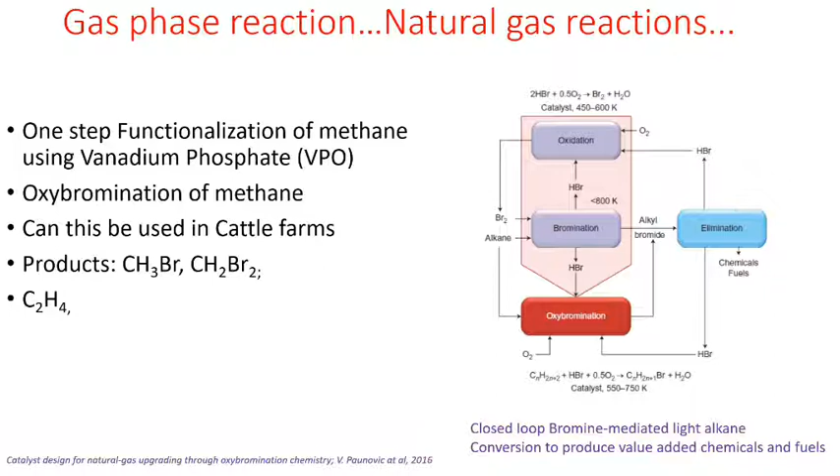Then you could actually convert methane into something more. That is a very hard process to do, so you need a really good catalyst to convert CH4 into C2 and something else, basically increasing the number of carbon atoms in that molecule. It's a terribly hard, complex problem, but you can use a catalyst to do that. That's what we're trying to see, because we have a lot of natural gas and we probably can do something else with it.

So that is how we started on this—because I can see Dr. Boss is looking at his watch, I'm going to go faster here so that we have time for questions.

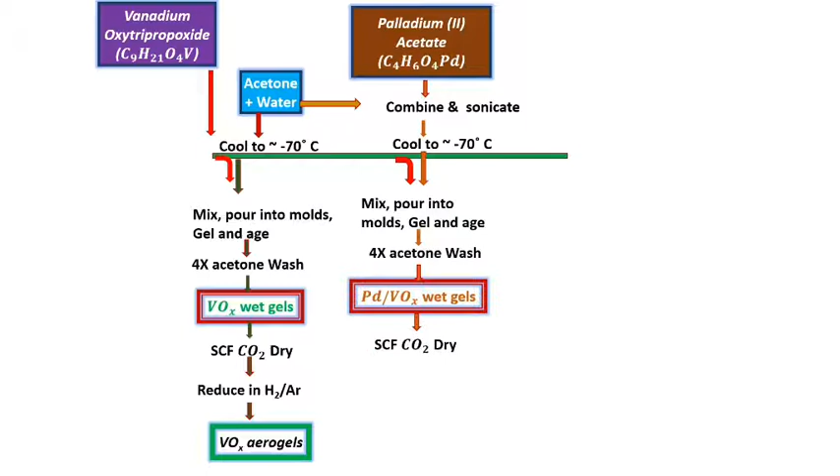So we looked at the lignin literature. Again, we go back to our roots, which is making catalysts, and then we build this catalyst using the same process, but now we included palladium into the mix. When we put in palladium, this became a very effective catalyst, and this is what Ms. Brooke was doing over the summer.

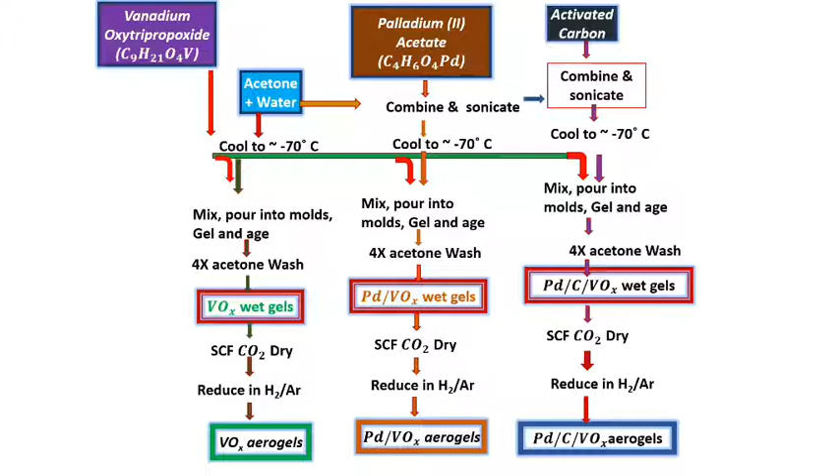So this is where we are right now—this process is ongoing. We could also add activated carbon, and then we ended up with another catalyst. This is what we are trying to use to cleave those lignin bonds so that we can produce something else other than what you saw in that complex molecule. So there is still some work to do.

We need more research. We are also looking at gas phase reactions that can be catalyzed by this kind of catalyst. Gas phase reactions are terribly hard to do, so hopefully from CH4 we can produce something more manageable or better than that.